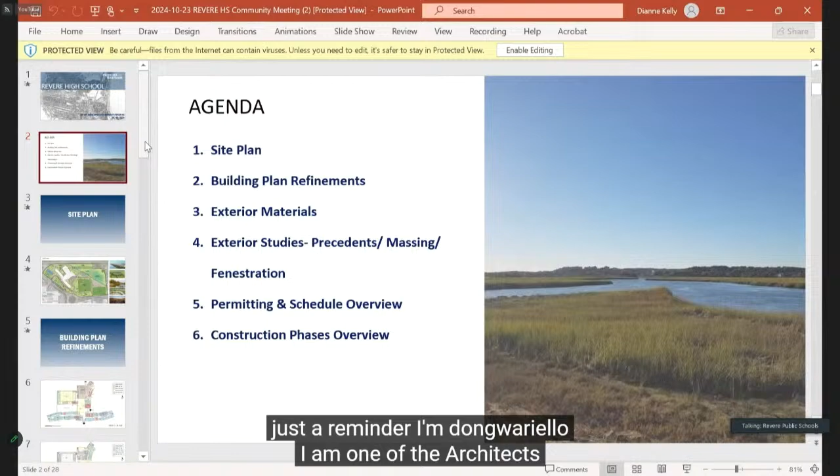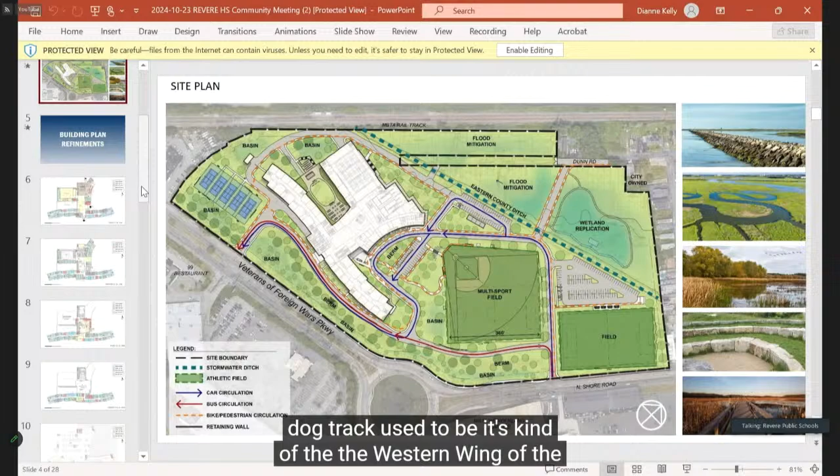We are going to walk through the site plan to start the presentation. I just want to remind everyone, the new Revere High School project will be built on the former Wonderland site. Just to give some context, we're building approximately over where the old dog track used to be. It's kind of the western wing of the new building. The classroom bar is that gentle wave you see on the south side, starting closest to the rotary and then traveling to the left of the screen.

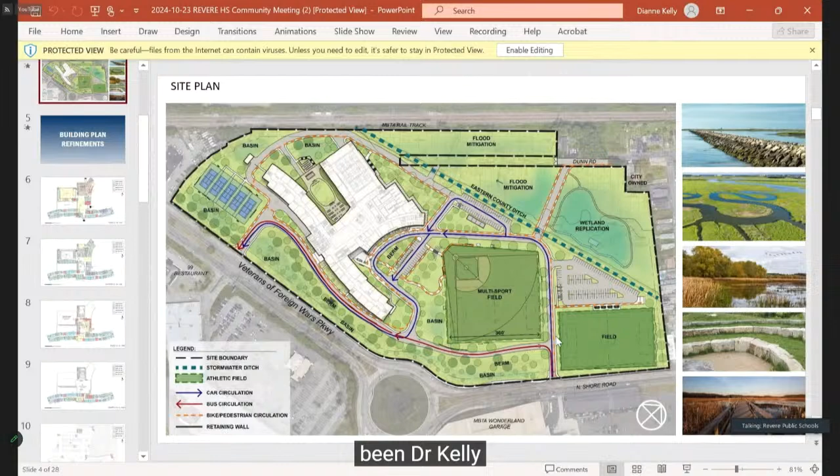The main entrance is between... Dr. Kelly is Vanna White for me, thank you. That's the main entrance onto the site, directly across from the Wonderland T-stop. Cars will travel north, split the fields, and then circle around and drop at the main building entry, which is approximately in the location the arrow is showing, and then come around and exit.

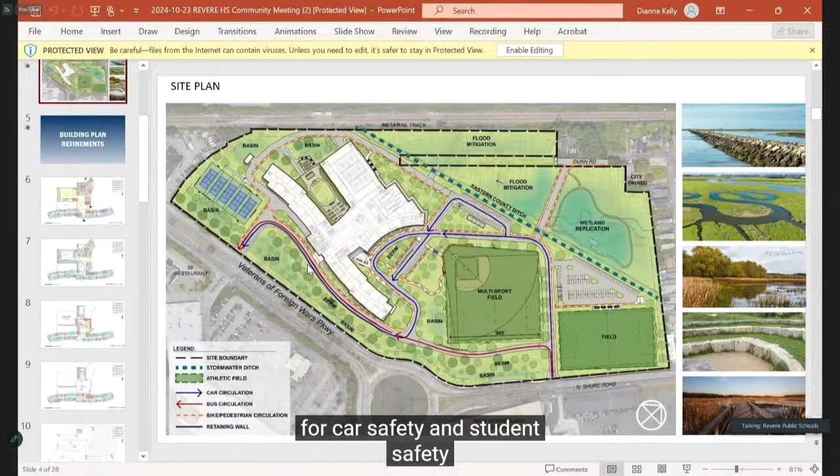The buses take the same entryway as the cars, across from Wonderland, and they take a left-hand turn and take a separate approach to the building on the south side, parallel to the roadway, dropping students into the heart of the school, in the middle of the academic wing. The idea is for car safety and student safety, that we separate cars and buses from a drop-off and pickup standpoint. Circulation can also occur around the building.

Just a reminder that this building is elevated approximately 14 feet. There's under-building parking, and that is because this is in a floodplain. We're so close to the coastal line that we need to elevate our building in the event of a major water storm. That allows us to get under-building parking. Our first floor is elevated.

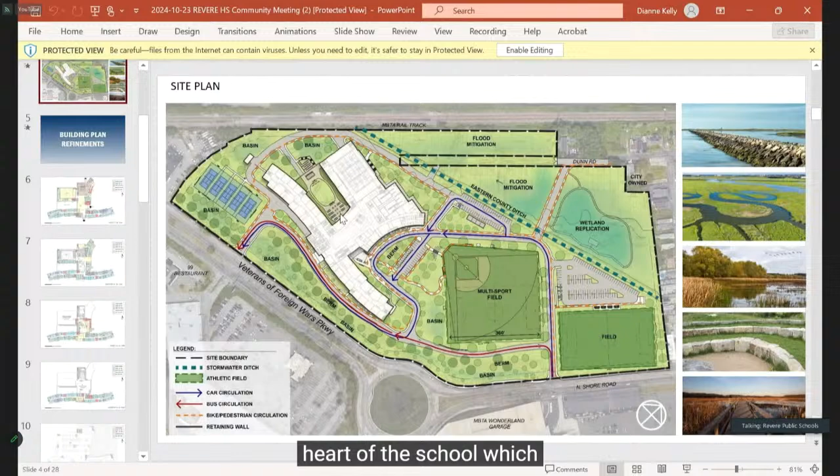That academic wing on the south side is 4 stories tall. The heart of the school, the central piece, is 3 stories. We've got a music and performing arts wing that is 2 stories tall. The theater starts on the 2nd floor, and the gymnasium is that largest rectangle on the northwest side of the building.

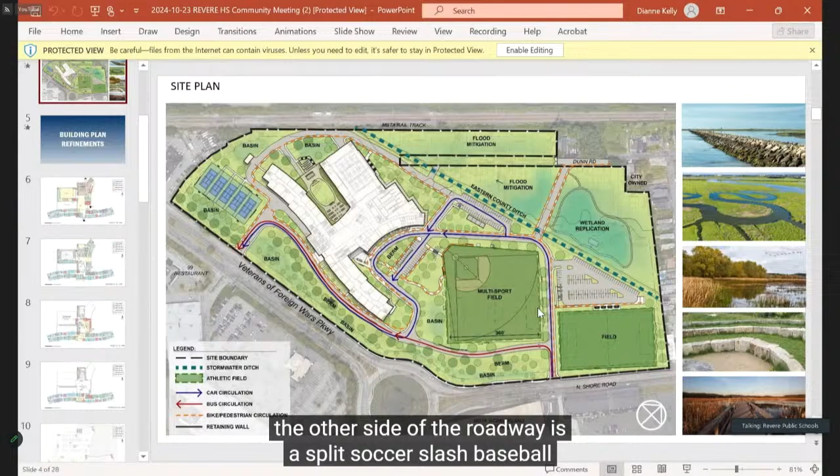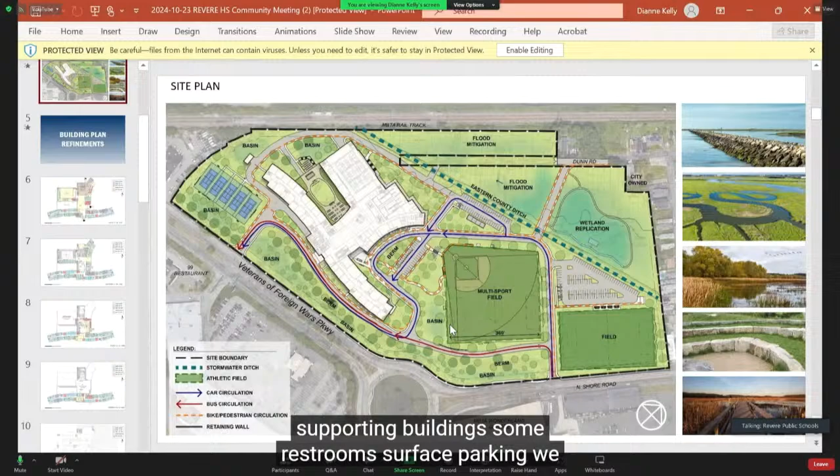For context, we have 2 fields, multi-purpose turf. The easternmost one is laid out as a soccer field. The one on the other side of the roadway is a split soccer/baseball field. There will be bleachers and a supporting building with restrooms, and surface parking. We have approximately 650 parking spaces planned, with somewhere between 300 and 350 under the building, as I mentioned.

The other 300 or so parking spots are surface and spread out throughout the campus for access. The dashed teal line traveling east-west on the site is an open Eastern County ditch that collects stormwater from the city and takes it out to Rumney Marsh. We are not planning to develop that.

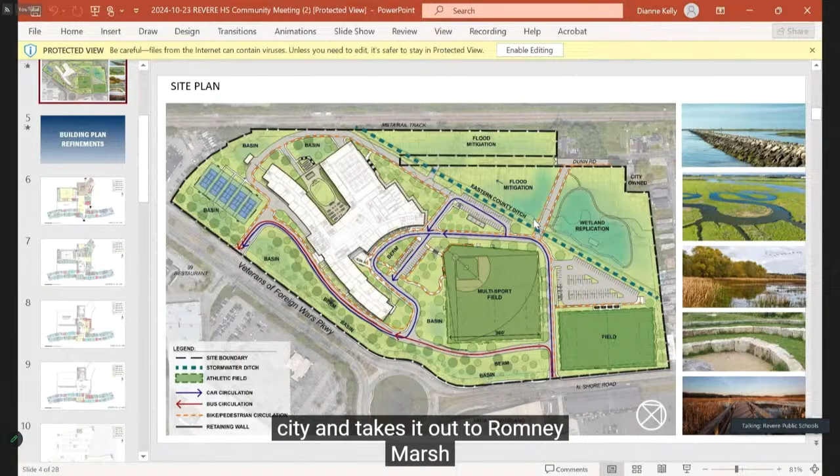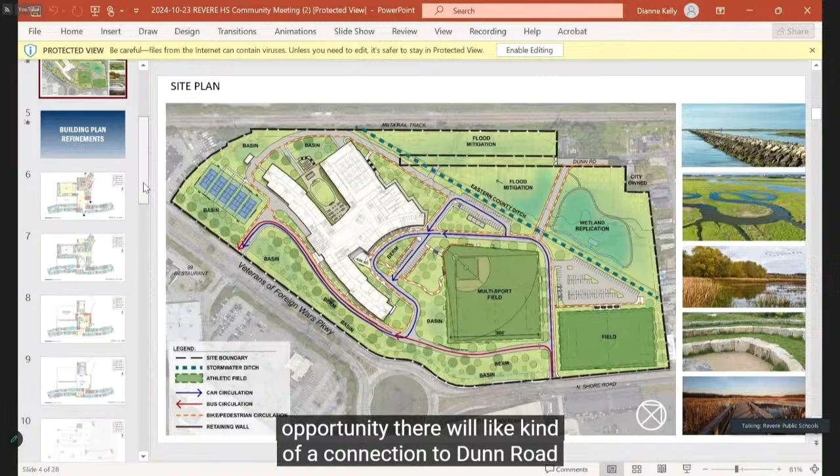To the north of it, we will replicate some wetlands that currently exist on the inside of the old dog track, providing an opportunity for outdoor learning, science projects, and a way for students to use the campus as a learning opportunity. There will be a connection to Dunn Road, but that's by gated access only. And then there are 5 tennis courts on the far west side of the campus.

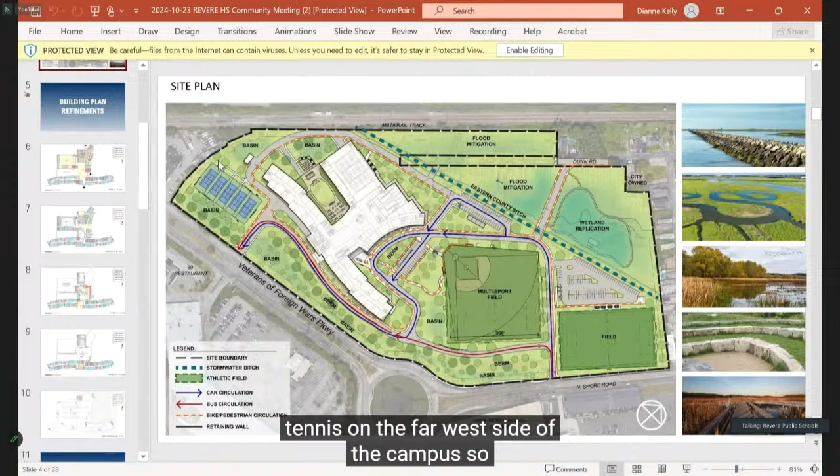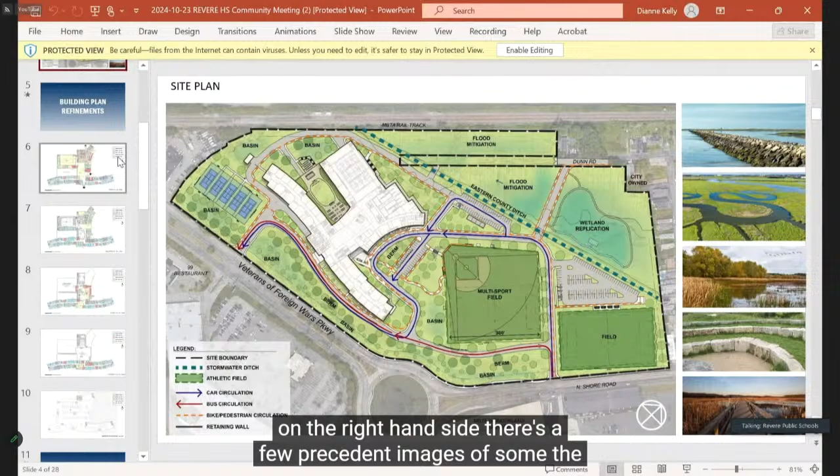So with that, I can get into the building plans, but you can see on the right-hand side a few precedent images of natural resources here in Revere that we are hoping to provide, giving a natural look and feel to the overall campus with this project.

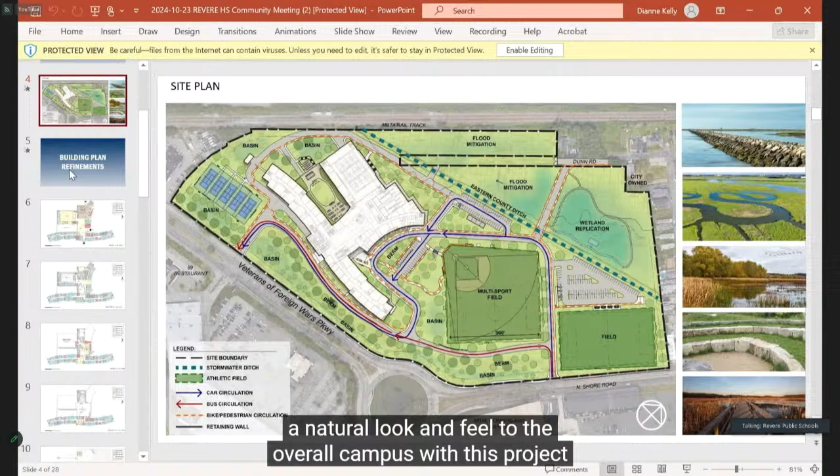So if you would move forward please, Dr. Kelly, to the building plans. I will walk through this briefly. We did this last month, so I don't want to dwell on it.

I think that was recorded, but just a reminder, the 2 black arrows are the 2 major entrances into the building. The one on the right-hand side of the screen is the main entrance where cars will drop off, and that's also where visitors will approach the building after hours, after drop-off and pickup hours. If you're arriving midday, you would approach the main entry through a secure vestibule.

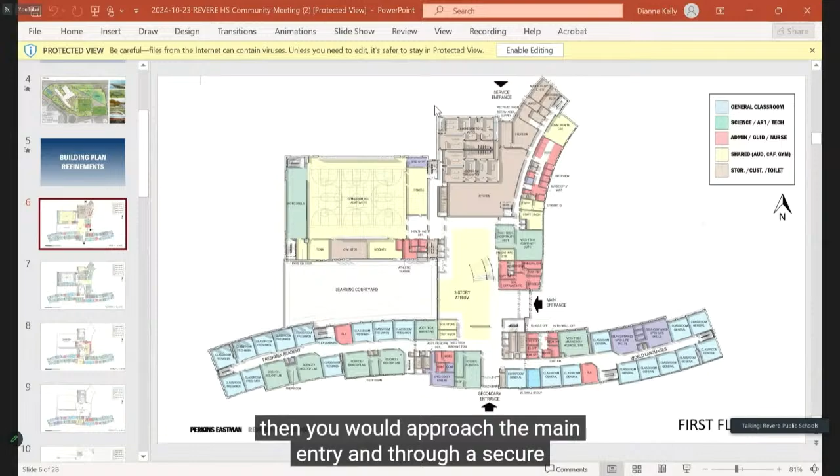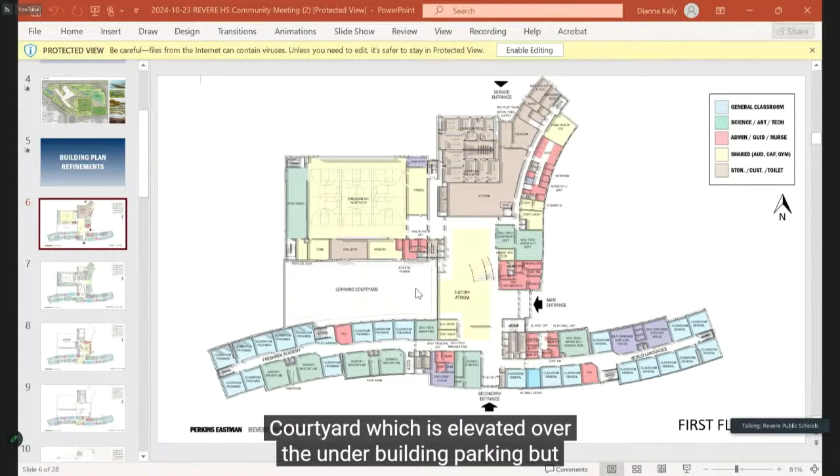The bus drop is the arrow on the south side of the building, and that takes you into the central space, which is really the heart of the school. That also serves as the main student cafeteria and connects out to the outdoor courtyard, which is elevated over the underbuilding parking, but is intended to be a wonderful outdoor space where students can learn, socialize, and spend time outside on a beautiful day like today.

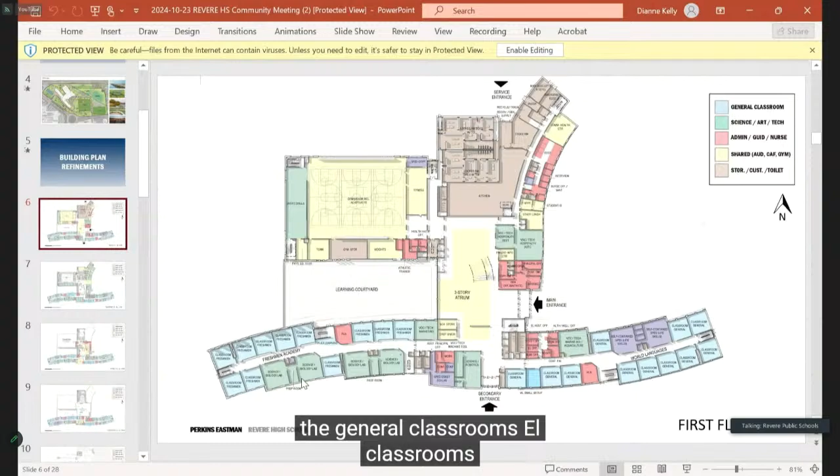The academic wing is 4 stories tall, on the south side. It's sort of repeated as we go up through the plans, but just want to mention that the blues are the general classrooms and EL classrooms. The green or tealish green are science or tech spaces. The purple are special ed spaces intentionally spaced throughout the building per DESE standards, and the red is where adults sort of are.

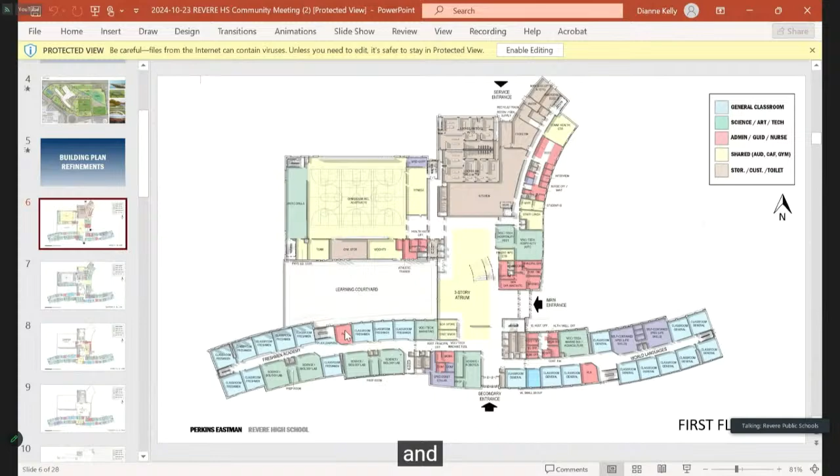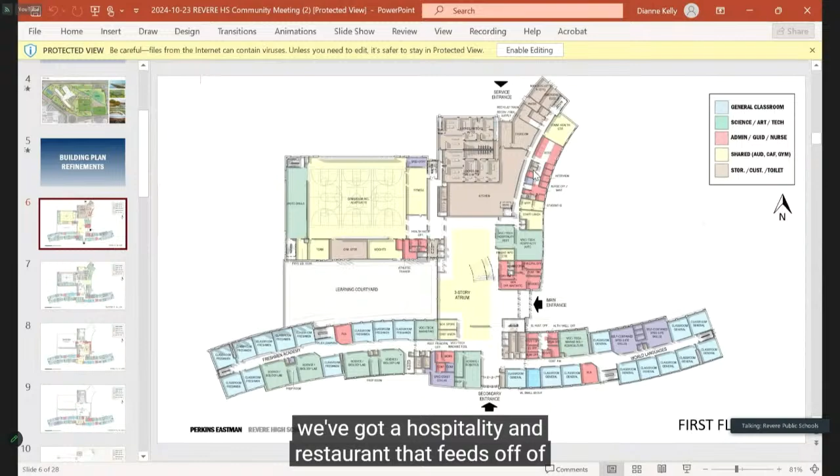So it's teacher planning and office suites. Speaking of adults and office suites, just north of the main entrance is the secure main office. That will also have the SRO and some other spaces off the heart of the school, wanting to be adjacent to the main entrance. We've got a hospitality and restaurant space that feeds off of that heart of the school area and is intended for student education as well as community use.

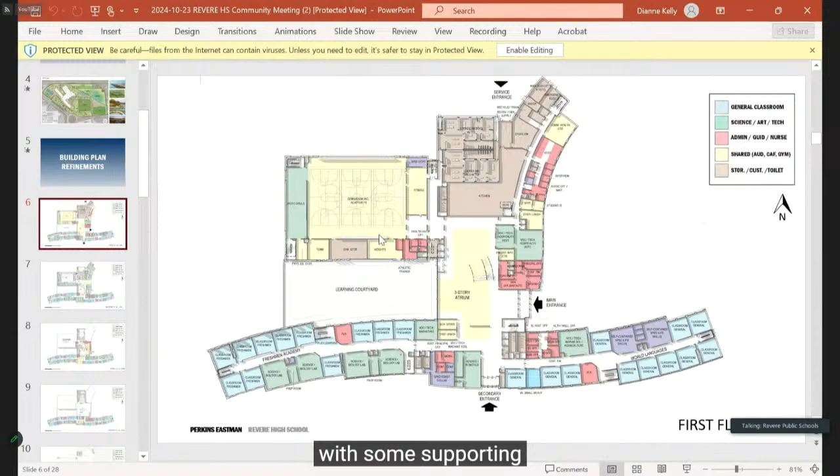And then we have the locker rooms in brown to the north of the drawing that support the main gymnasium, which is the far left rectangle - an 18,000 square foot, 3 cross court, 1 main court gymnasium with some supporting weight, fitness, and Junior ROTC spaces.

Next floor up, we've got again the academic wing, which is sort of a standard in each of these 4 floor plans. We've got off the heart of the school some of the art spaces on this floor that can open up to the heart of the school and provide some connection and excitement as you look in and see what the students are learning and doing in art class.

We've got a freshman cafeteria specifically meant to serve the freshman academy, which is the academic wing - the left side of the academic wing, the first and second floors currently. What that is, is an entryway into the high school. It's really a place for students to not feel overwhelmed by the overall size of the building, but to get to know their peers as they come together in their first year of school.

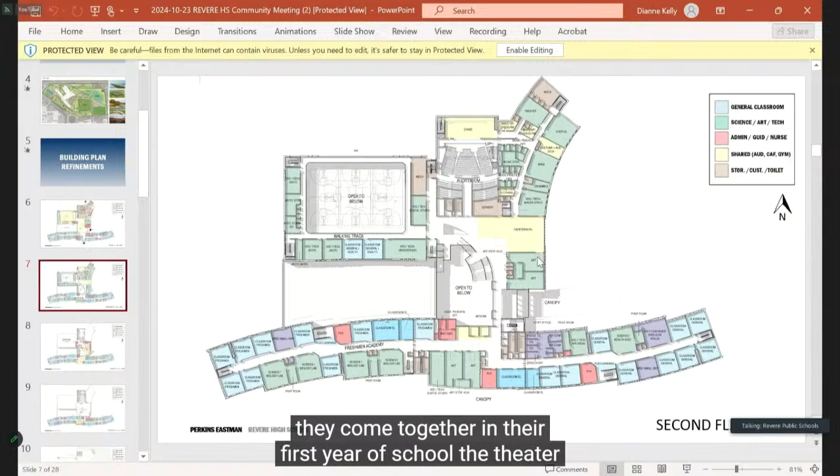The theater and auditorium is accessed off this second floor, and there's an adjacent performing arts wing that has band, orchestra, and theater spaces for students to learn.

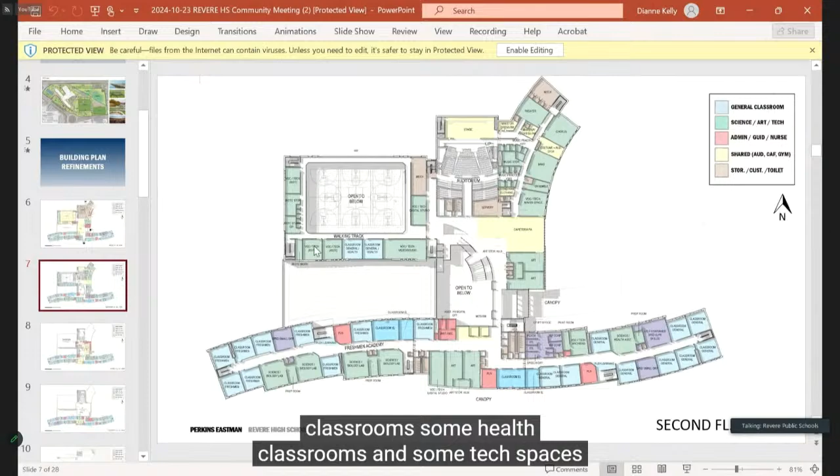And then around the gym, we have a walking track, which is intended to support the physical education program, but also just serve for students and staff who want to get their steps in. Off of that walking track, there's some junior ROTC classrooms, some health classrooms, and some tech spaces, digital art and video production.

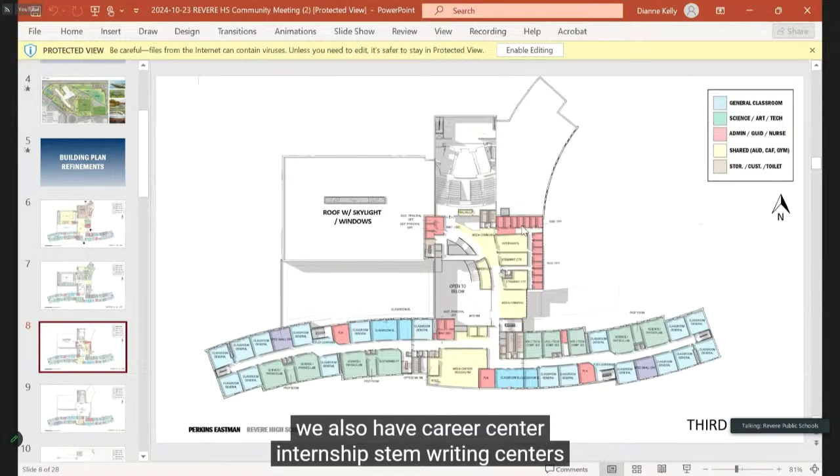If we go up one more floor to the third floor, we have, again, off the heart of the school, a lot of the media center spaces. So we have a main media center that has the stacks and places for students to sit and research, and classes to come, but we also have career center, internship, and STEM writing centers that support student writing and tutoring programs that exist currently at the school. Those are spread out around the heart of the school and are intended to be an extension of the Learning Commons, or the media center, as we call it.

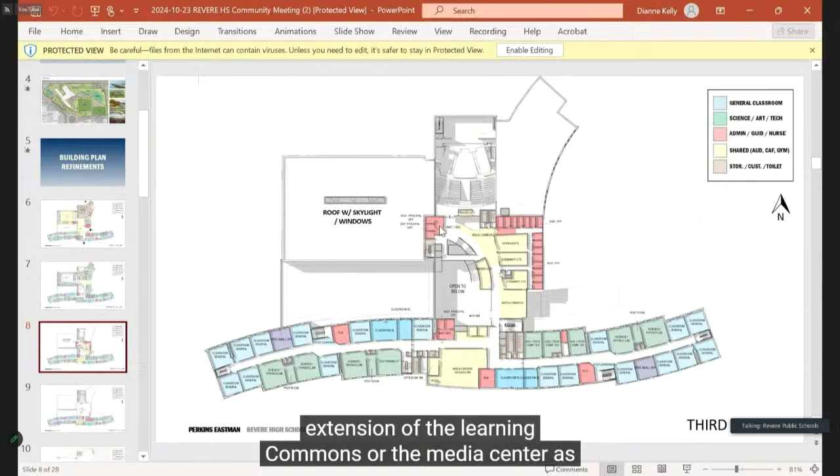If we go up one more floor, there is a 2-story addition to that main media center on the south side. That's really a beautiful daylit space facing south and facing the Rotary, and perhaps through the buildings to Revere Beach, a couple blocks away. This is the highest floor - it's the only part of the building that's 4 stories tall.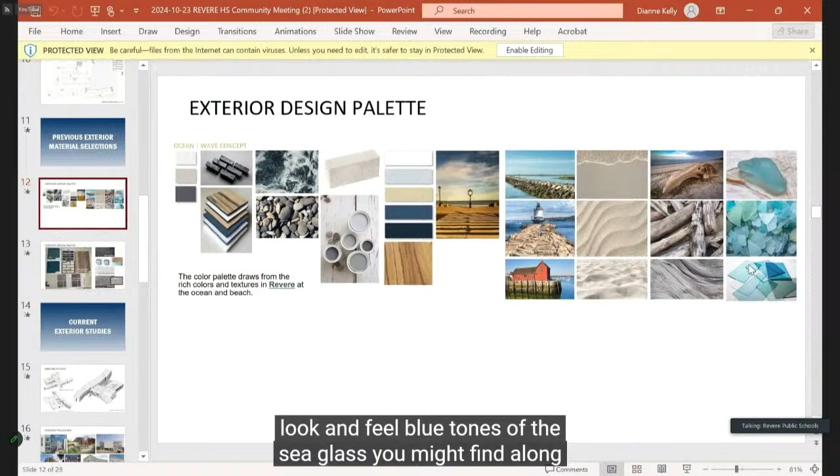If you go to the next slide, those are actually real samples of the actual materials that we plan on using, and you can start to imagine it with some of the renderings that we've done.

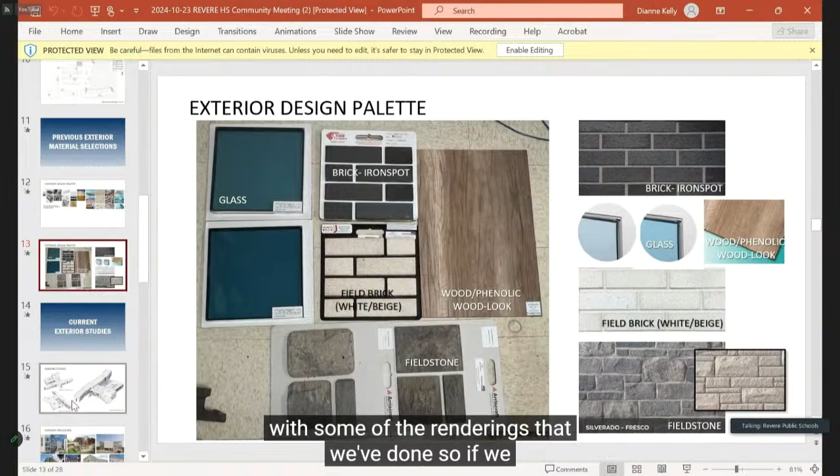So if we move forward into the exterior studies, first we've got massing studies. Again, you can sort of tell where you are by the academic wing, that 4-story tallest piece of the building. That is where most of the learning will occur in this building. The main entrance is that biggest rendering.

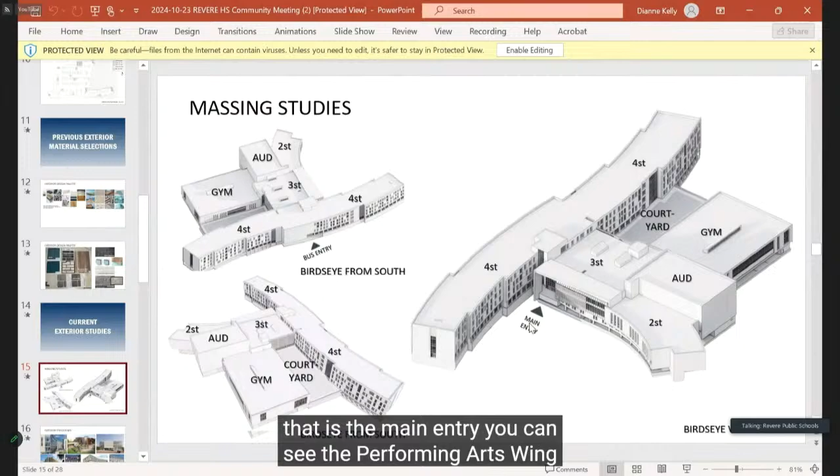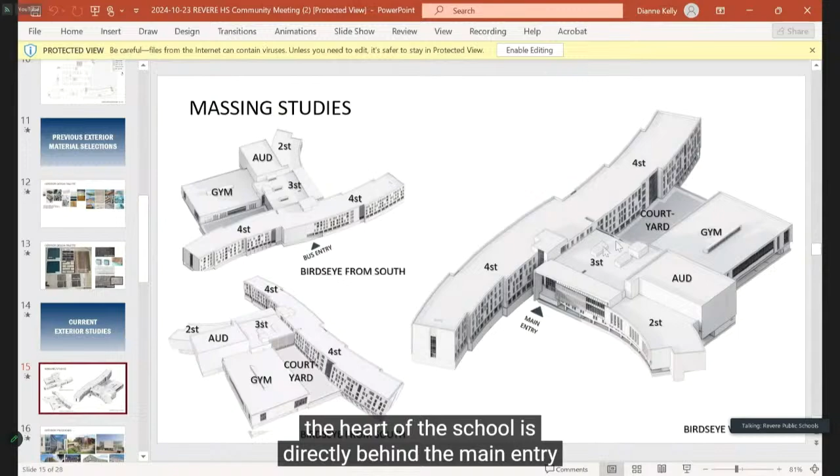There's an arrow - perfect, thank you. That is the main entry. You can see the performing arts wing sort of splays off to the right-hand side of that. The auditorium's behind it. The heart of the school is directly behind the main entry. And then you can see the courtyard that is flanked between the academic wing and the gymnasium. The views on the left are just other sides of the building.

From there, we'll show some quick exterior precedents, the look and feel of the exterior with the light brick and some of the glazing and varying window widths, solids and voids, a little bit of wood as you move through some of these renderings. And these have even changed since we put this presentation together.

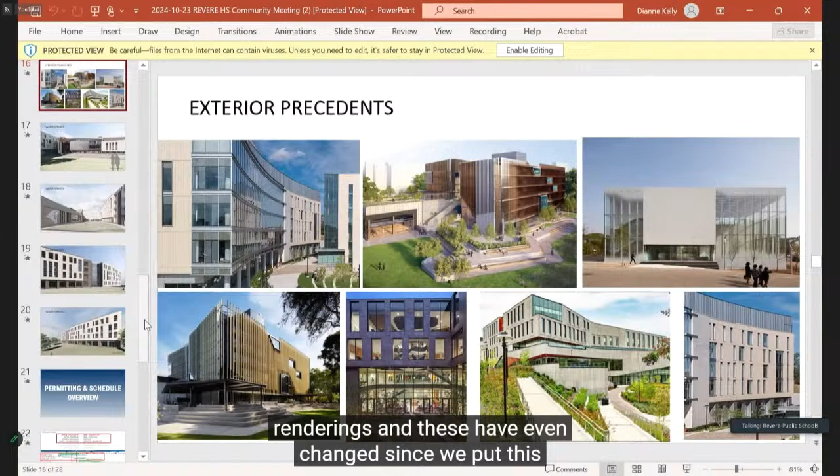We're getting feedback and making adjustments, but if you want to click through these, Dr. Kelly, I can just speak to it. This has been updated, but hasn't been shown to the building committee quite yet, so we're not ready to roll the new ones out, but this is the main entry.

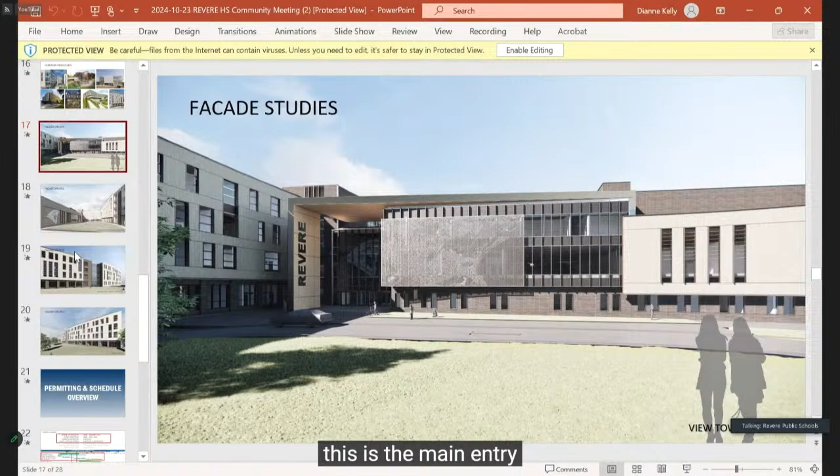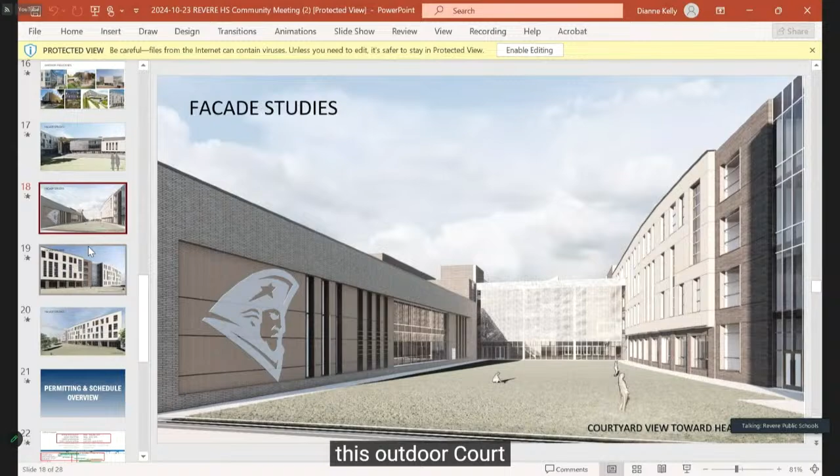You can see this is the courtyard with the gym on the left and the academic wing on the right. You can see the heart of the school in the center of the screen. Again, this outdoor courtyard is just rendered in grass right now - it's really intended to be so much more. So stay tuned for some updates there, some exciting outdoor learning spaces and relaxation spaces.

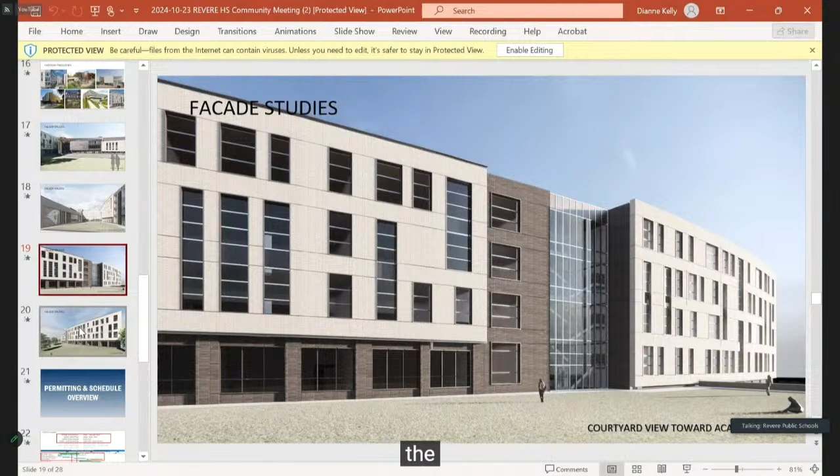The next rendering is of the bus entry - I'm sorry, this is the academic wing. This is one side of that gentle curve, the longest, tallest piece of the building. And lastly, this is from the far east side of the academic wing. You can start to see how long this building actually is from the roadway.

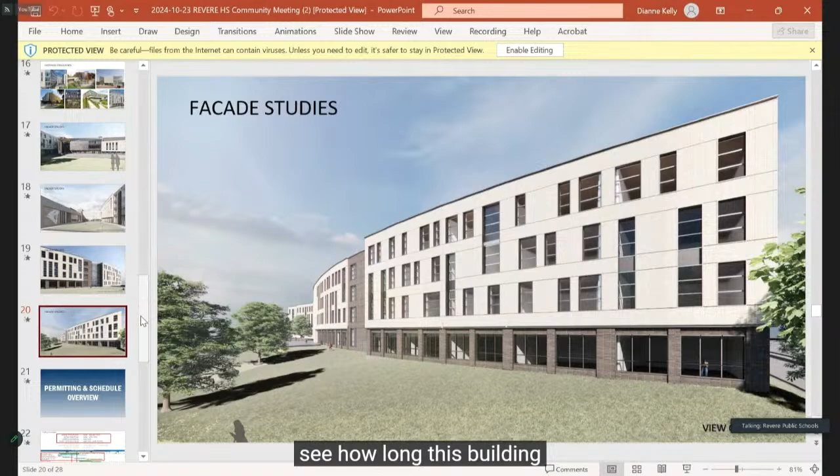So with that, that's the design update. I will turn it over to permitting and schedule overview.

Is that you, Brian? Yes. Claire? Okay, that's you. Thank you, Dawn.

So we did a really high-level flyover of the project schedule. Long story short, the headline is the current plan is to open the school for the beginning of the academic year in 2028.

But there was a request to talk a little more about where the project is at in the permitting process. We have two paths here that are sequential. We are in the design development stage right now and dealing with initial permitting. We have state permits and local permits to secure. The design development phase will last through January, February of next year.

And we will be through the Massachusetts Environmental Policy Act permitting, the first step that's called the ENF. We are well into the ENF submission and response time now. I want to point out what's at the bottom of the screen, and this presentation will be on the website.

If anybody would like to submit comments to the MEPA process, this is a standard part of it. You can visit that website, search for Revere High School. Their project number is 16879, or you can directly email the MEPA reviewer, Nicholas Moreno, at mass.gov. Again, those will be on the website if you folks want to use them.

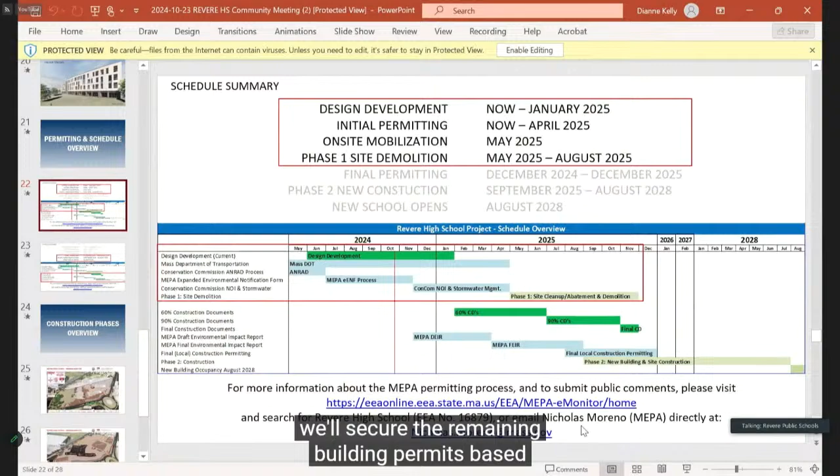Once we're fully through the MEPA process by next August, we'll secure the remaining building permits based on the bid documents established at 60%, 90%, and final CDs. By August, September, we will move from just cleaning up the site to actually building the new building.

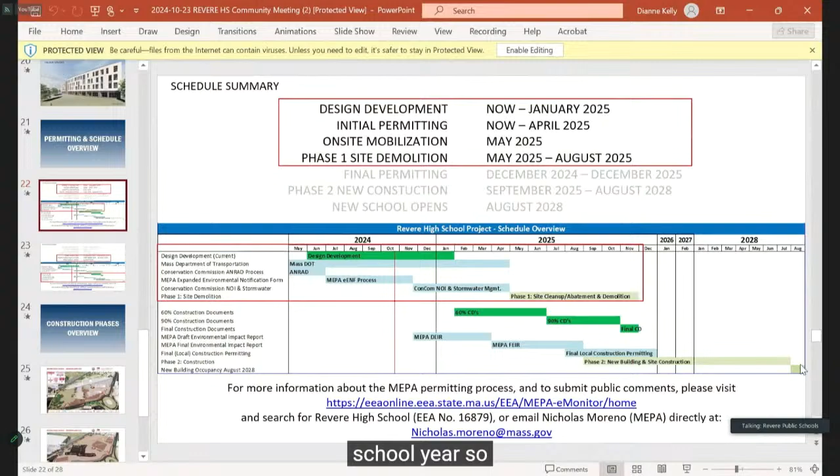We squished 2026, 2027 to fit it on the screen, but building opening is August of 2028 for the beginning of the school year. So that's more or less a permitting overview. I want to stress that people can go to the project website, or the websites at the bottom, to have their voice heard as part of the MEPA process.

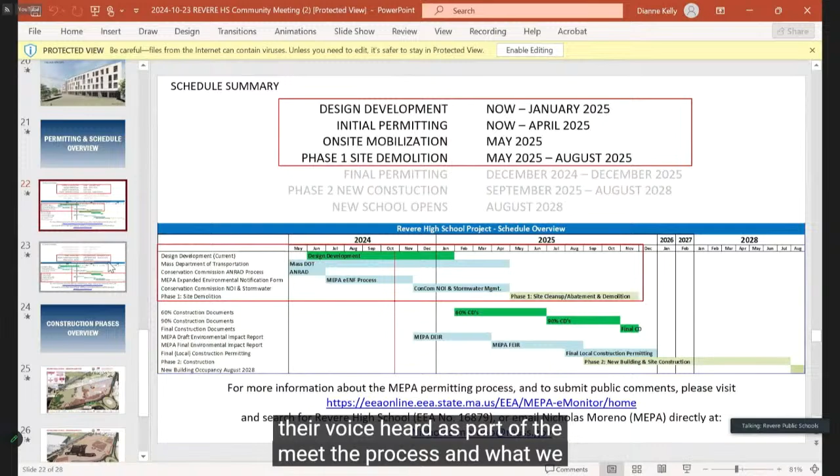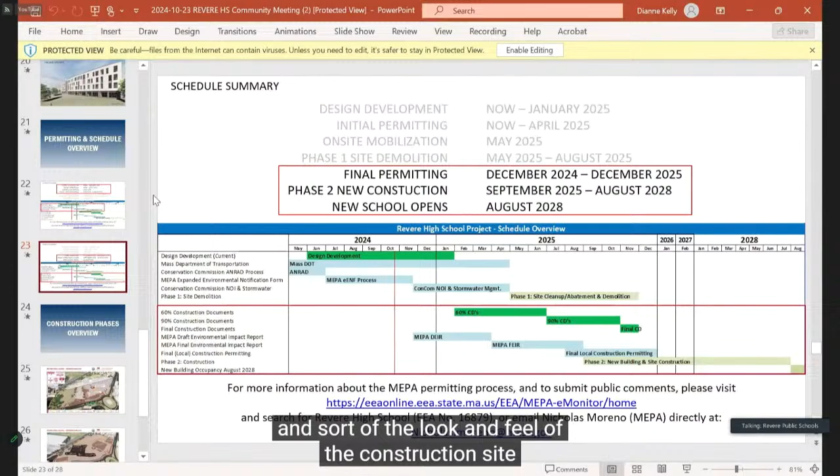And what we wanted to finish on tonight was having Christy Lyons from Consigli, who is the builder and construction manager for this project, run through the phases, how we're going to break this up, and the look and feel of the construction site over the next 3.5 years. So I'll turn it over to Christy now, who will start with a description of the next summer site cleanup and demolition phase.

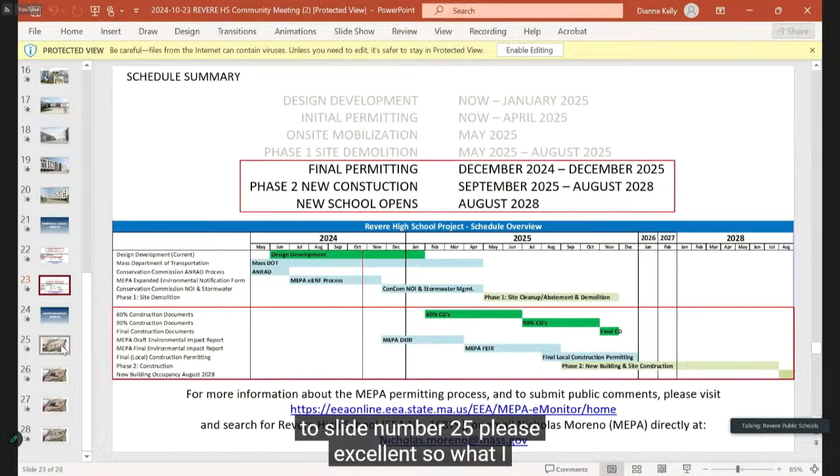Good evening, everyone. Thank you. If we could jump to slide number 25, please. So what I wanted to demonstrate here is really what you can expect when we mobilize to the site in May of next year.

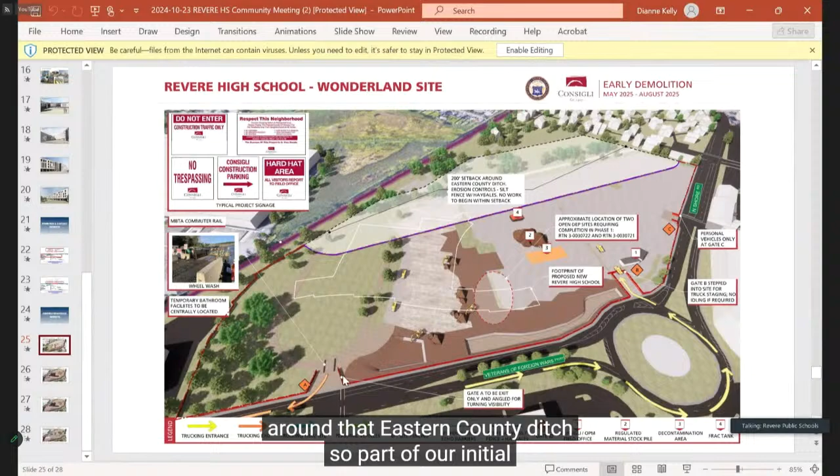You can see we have a very vast site, outlined in red. That represents our initial mobilization and our site fence, or site perimeter. We are limited to a 200-foot setback around that eastern county ditch. So part of our initial mobilization will be installing erosion control and temporary fence measures along that border.

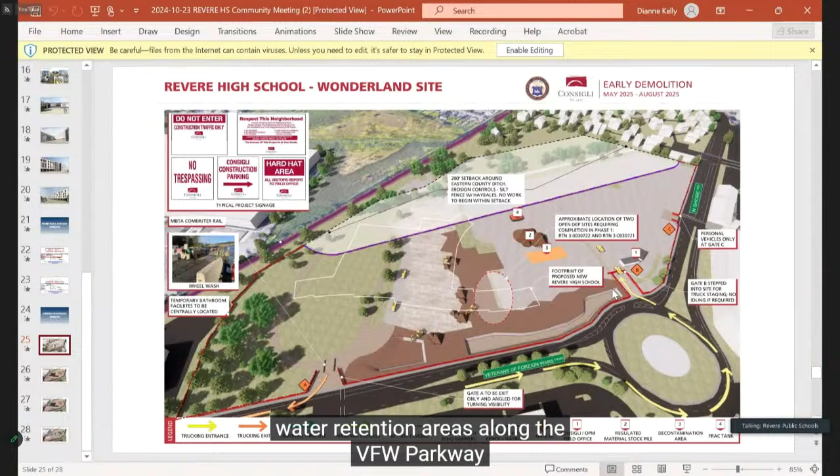Additionally, we will do the initial site clearing, which includes some utility bypass and relocation, demolition of existing site features and structures, as well as removal of some of the existing paved areas in preparation for soil removal and foundation excavation. We'll also establish some of the stormwater retention areas along the VFW Parkway.

I do want to note that our construction access will be directly off of the rotary. You can see that we've set our site gate back about 150, 200 feet to really try and get trucks off of the rotary, off of the road, and onto our site to avoid any site congestion or traffic congestion on the parkway.

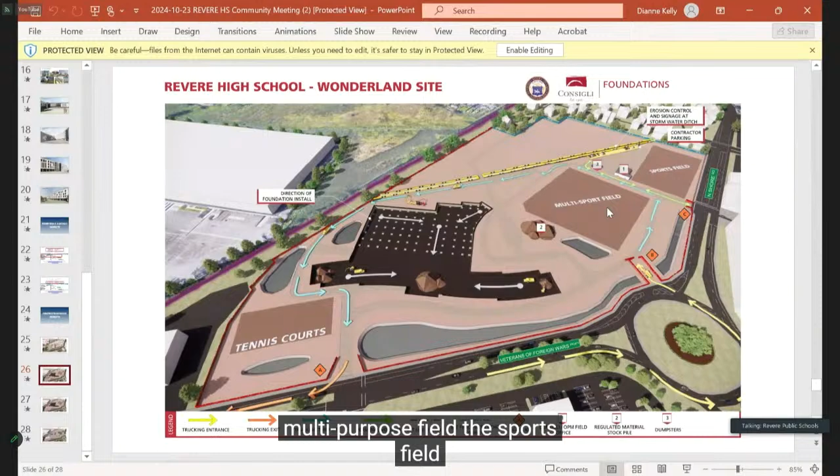From there, after this early phase, we'll then move into the next phase of construction, which includes foundation excavation and then building essentially the entire building structure. We'll also be working throughout the site on the tennis courts, the multi-purpose field, and the sports field. Again, with the size of this site, our goal is to get trucks off the street as much as possible and stagger them on the site to alleviate any unnecessary traffic congestion.

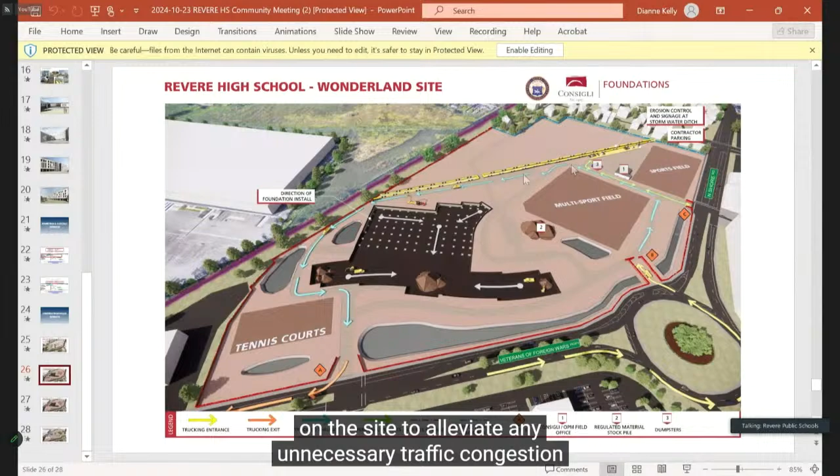Our next phase includes foundations, after the foundations, steel erection. This is when you'll see the structure start coming out of the ground - one of the most dynamic parts of the construction, seeing the steel structure being erected.

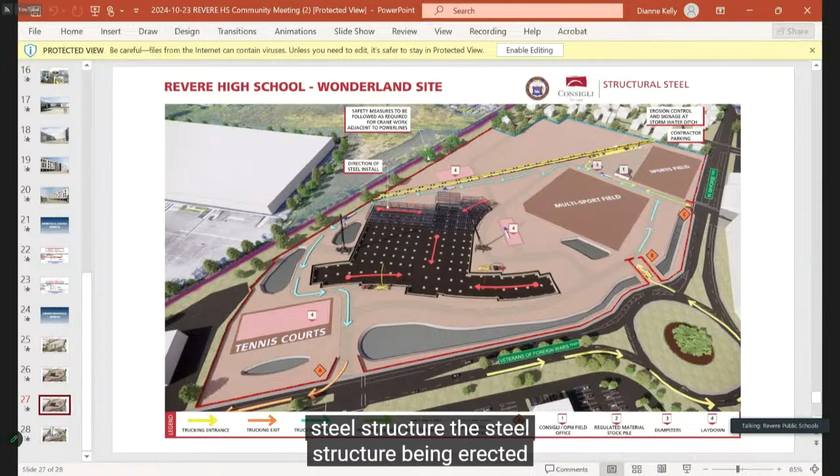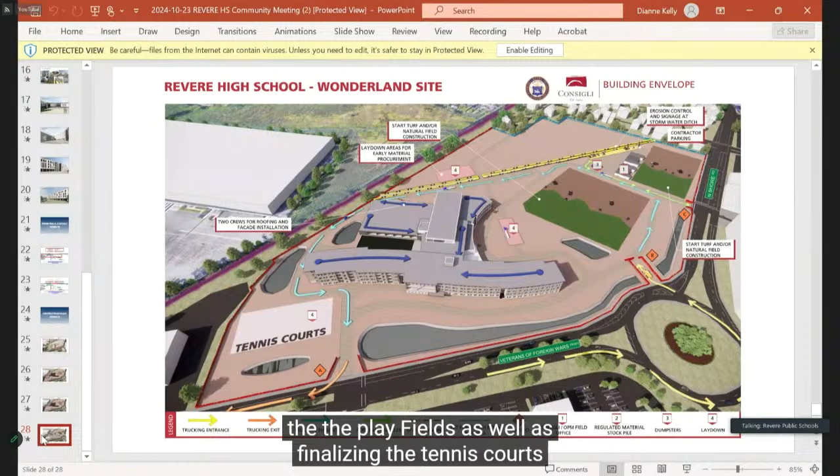And then lastly, the last phase, bringing us to completion, is all of the building facade and all of the interior finishes. At this point, we'll be doing the final turf on all of the play fields, as well as finalizing the tennis courts. Building will be completed in the spring, summer of 2028 in preparation for the start of the new school year. Thank you, Christy.

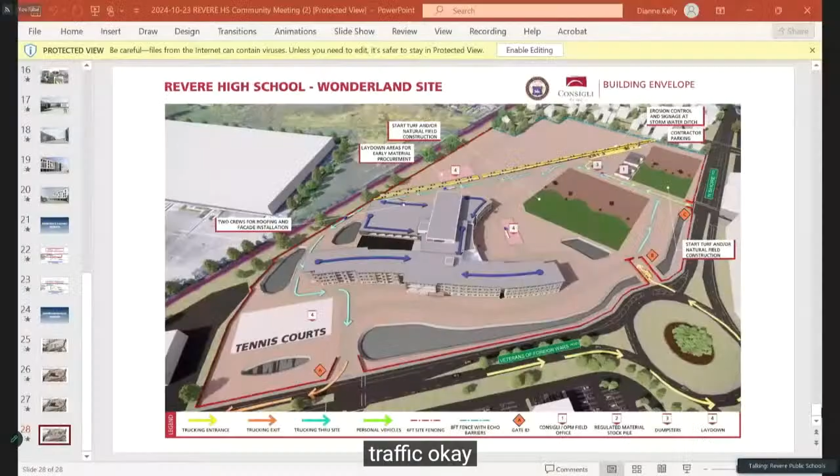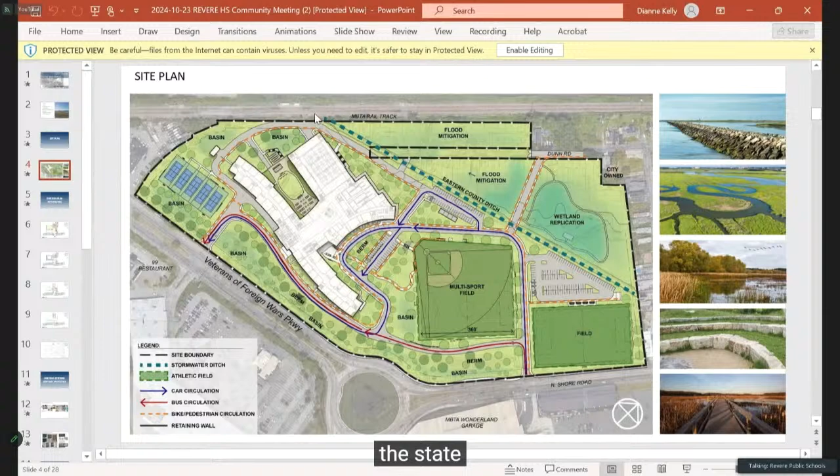Let me get us back to the very beginning. One thing I want to mention is that the city is working with the MBTA on traffic mitigation and on creating safe routes like overpasses and things of that nature. That's something that's going to be a work in progress, not part of this project, but something the city is thinking about separately. One of the groups they're working with on that is the state and federal legislature, who have recently put significant money toward a study for a commuter rail line.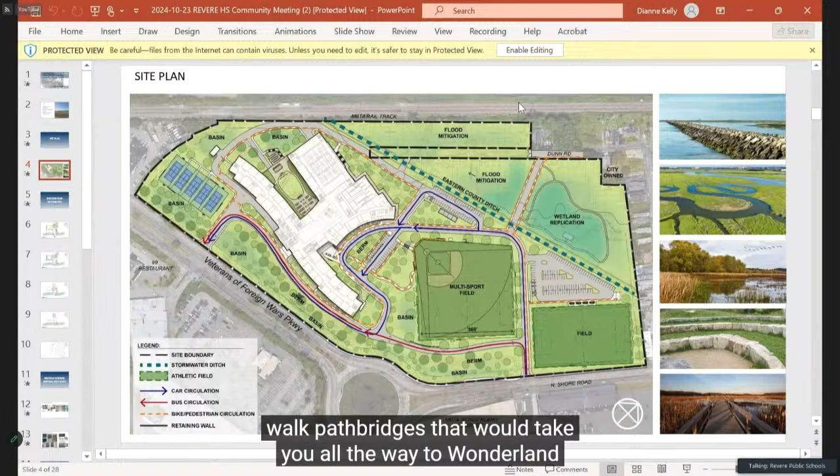Right on the map, there's already an MBTA rail track there. The idea is to put a commuter rail station back here, probably somewhere over in this area, and then create walk path bridges that would take you all the way over to Wonderland, which would help with getting kids who are walking to school safely.

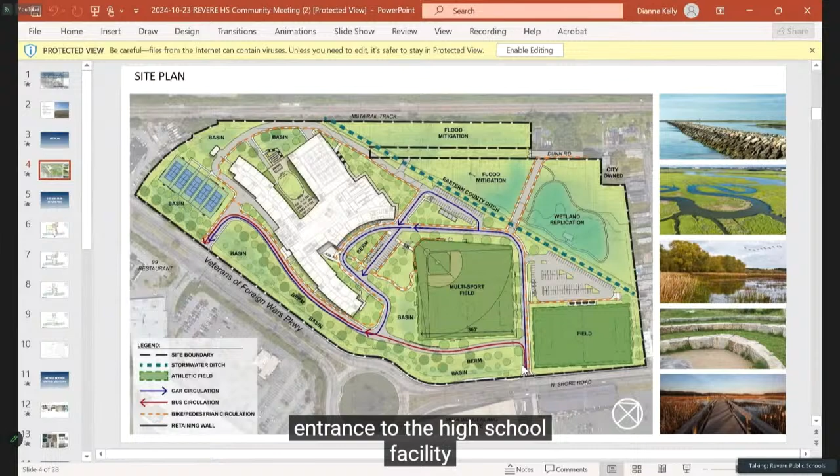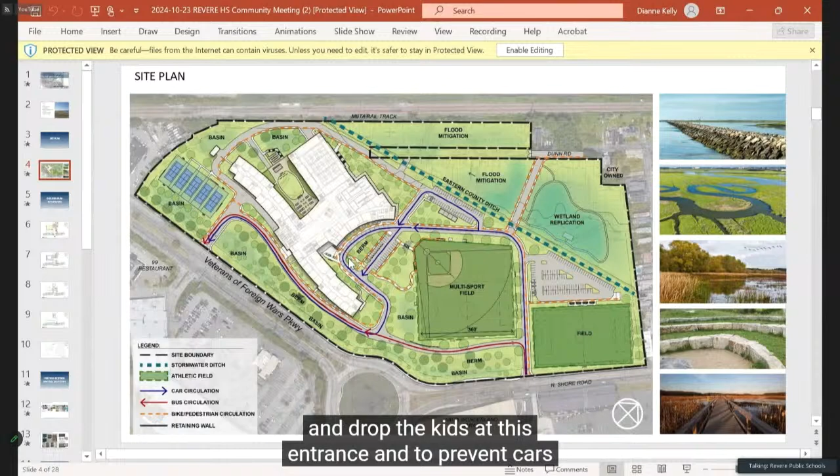In terms of traffic mitigation, this is the main entrance to the high school facility. Buses would come all the way in here. Sorry, cars - parent drop-off would come in, loop around, and drop kids at this entrance. To prevent cars from backing up, buses would take a separate route, and those students have their own entrance over here for bus drop-off.

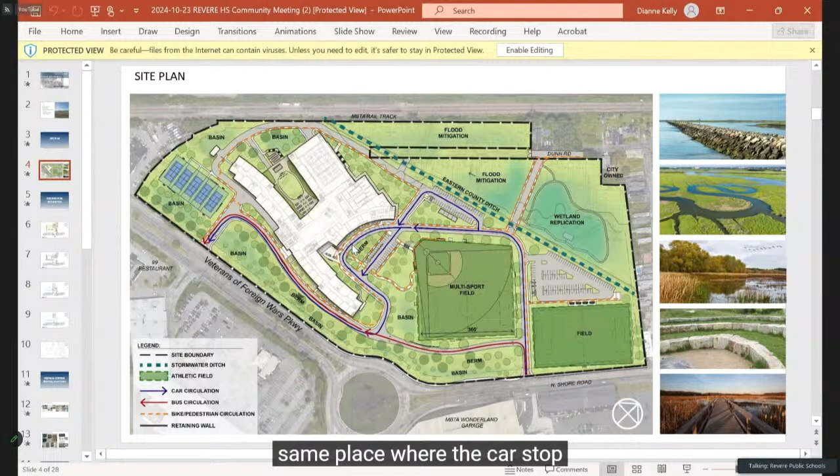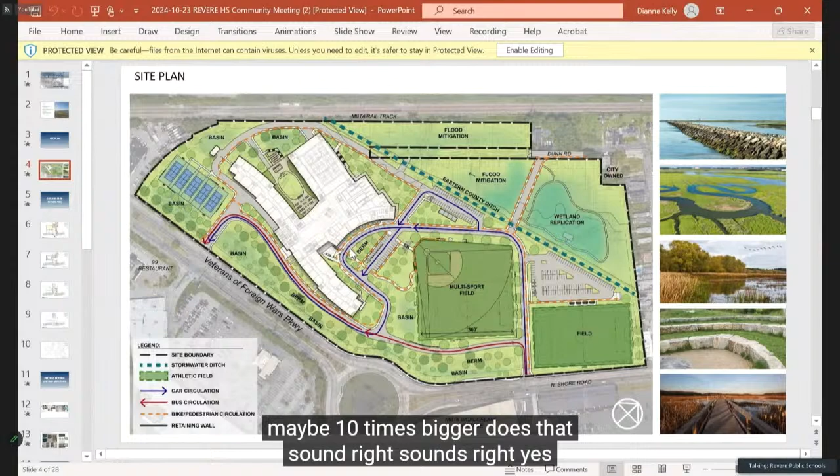Right now, the buses come in with the cars, a bus stops in the same place as the cars, 55 kids get off the bus, and the cars line up behind. This entryway for cars - I feel like we talked about it being maybe 10 times bigger than our current driveway. Does that sound right? Sounds right. Significantly longer. So if we might have 10 or 15 cars line up right now, we would have room for 150 and not have buses mixed in.

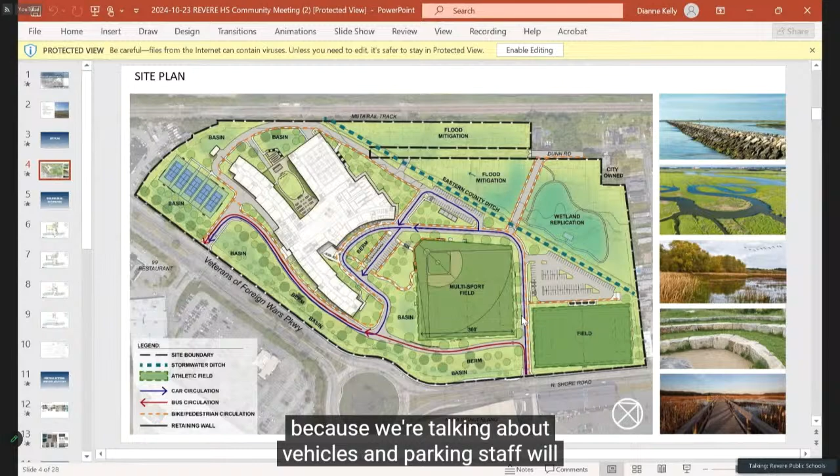And I'll mention, since we're talking about vehicles and parking, staff will come in the way students do, but they'll veer off here and go up underneath the building to park. So even staff won't be queuing up in that line to get to work the way they have to now, because there's only one entrance to the high school.

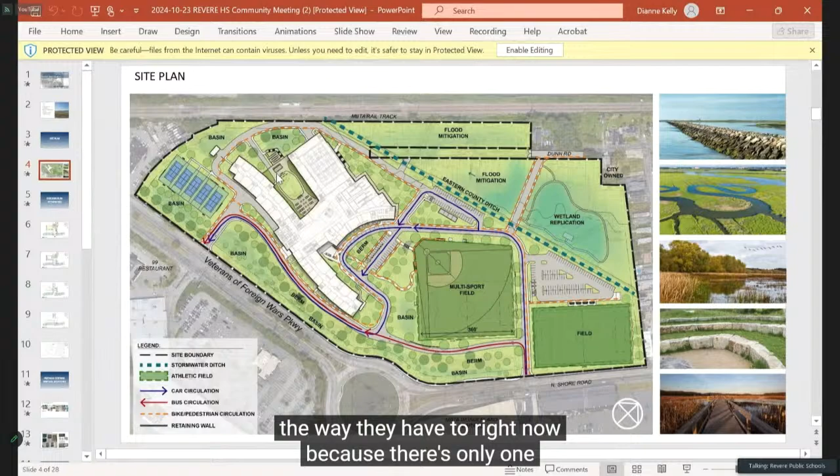Does that answer it? In a way it answers, but it's the traffic not only for students and staff, but I know North Shore Road traffic from Lynn going from the beach, all that traffic comes through that roundabout and tries to go to Boston. So I think that's a factor.

Yeah, and that will still exist. That's why our intention is to control what we can. The goal with this design is to get the vehicles coming to this school off of that road and off of that rotary as quickly and efficiently as we can, so that they're not contributing to that traffic, if that makes sense. Thank you.

All good? Yeah, no other questions.

I want to thank our consultants who've been so incredible working with us on all of these different design ideas. I just want to mention briefly that we did have 21 separate focus groups, including students and staff at the high school over the last two weeks. They've given us very valuable feedback on what the design should look like in classrooms and other areas of the building where they are the intended users. We wanted their input, since they're the ones who will be using this building. I know the design team is in the process of incorporating all of that feedback.